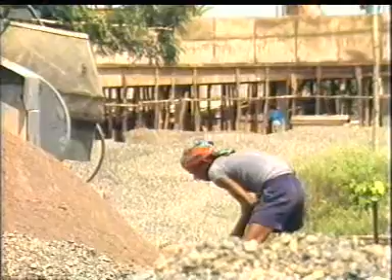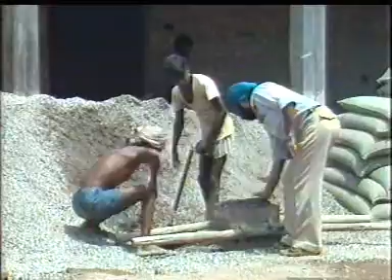Cement concrete is a versatile and most useful modern construction material. To achieve the desired structural and functional properties of hardened cement concrete, its manufacture and properties during plastic stage need to be suitably controlled and checked.

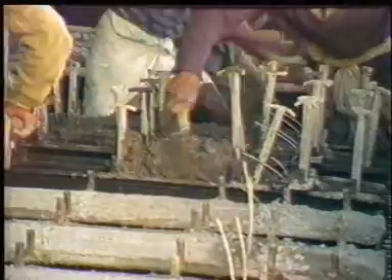The workability is the ease with which the concrete can be placed, molded, and compacted fully in its mold. More scientifically, the workability is that property of plastic concrete which determines the amount of useful internal work necessary to produce full compaction.

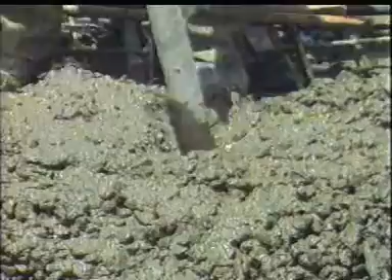Workability is defined as the property of plastic concrete which determines the amount of useful internal work necessary to produce full compaction of molded concrete without any segregation or bleeding. Good workability results in much better compaction and hence dense concrete with minimum air voids.

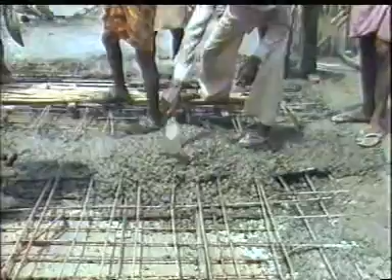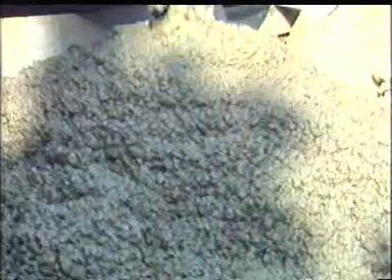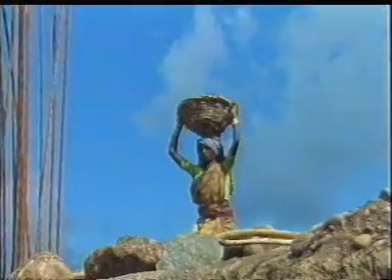The phenomenon of workability is associated with sub-concepts of ease of flow, which indicates flow characteristics of concrete. Prevention of harshness, which indicates surface finishing characteristics. Cohesiveness, that is, prevention of segregation, which indicates homogeneity of concrete. Workable concrete mixes should not segregate. Improper handling leads to segregation.

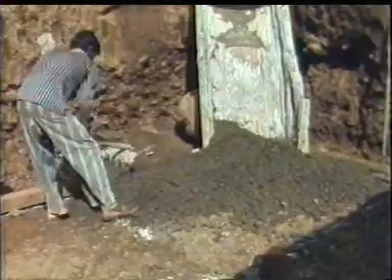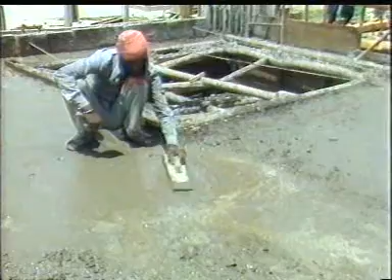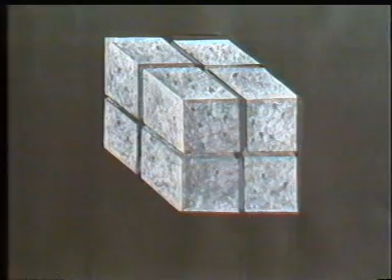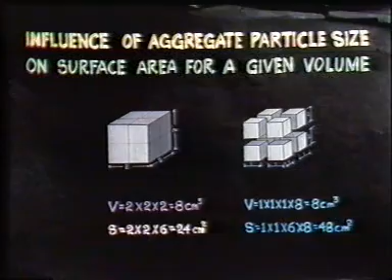Prevention of bleeding, which shows oozing of water and cement slurry to surface. Good concrete mix should not bleed during compaction and finishing. The size, shape, texture, and grading of aggregate particles affect their surface area. Surface area per unit volume increases with the decrease in size. Crushed aggregate has more surface area compared to rounded aggregate per unit volume.

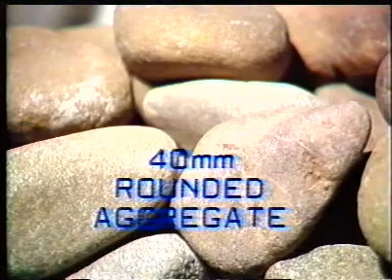Water used in making concrete lubricates the surface of aggregate. The quantity of water per unit volume affects the lubrication of aggregate particles and hence the workability. Thus, the size, shape, texture and grading of aggregate and quantity of water affect the workability of concrete. For achieving the desired workability, the quantity of water is decided on the basis of size, shape, texture, and grading zone of aggregate.

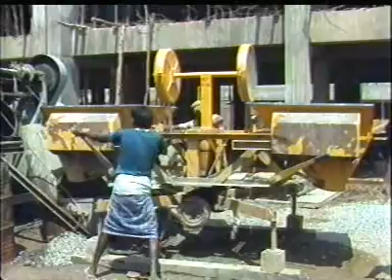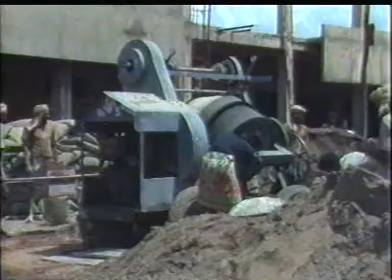To achieve the desired workability, adopt suitable aggregate to cement ratio and fine aggregate to coarse aggregate ratio depending on the sand grading zone, size, shape and grading of coarse aggregate. To achieve economy in the manufacture of concrete or higher yield, the proportion of sand should be just sufficient to produce cohesive concrete mix.

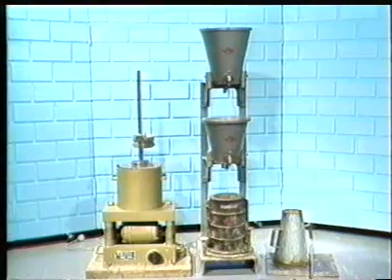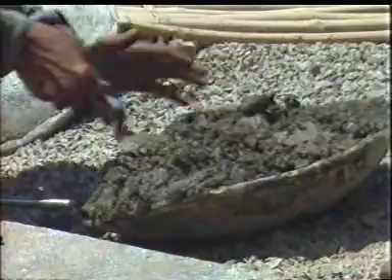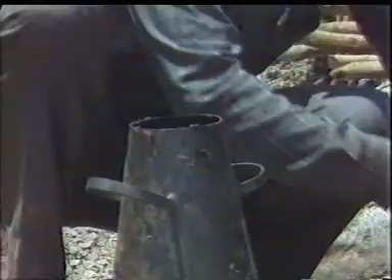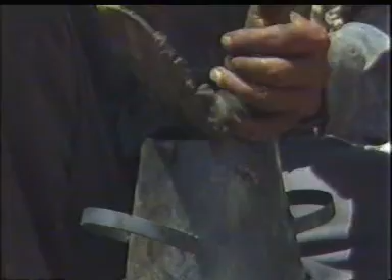A large number of tests are developed for the measurement of workability: slump test, compacting factor test, VB test. Slump test apparatus consists of a truncated cone having 100 mm top diameter, 200 mm bottom diameter, and 300 mm height. The slump cone is filled with concrete mix in 3 layers, compacting each layer with 25 standard strokes of tamping rod.

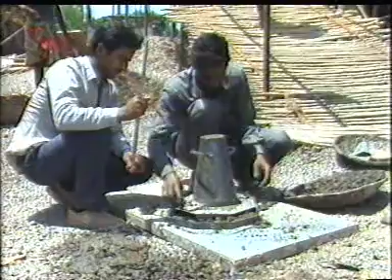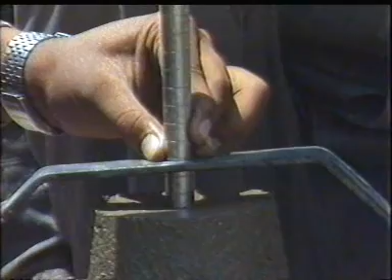The cone is lifted vertically without jerk, and vertical subsidence of top concrete surface is measured from the original top face of the cone. Depending on the type of concrete mix, the slump may be true slump, shear slump, or collapse slump. The slump test is ineffective for mixes of very low and very high workability.

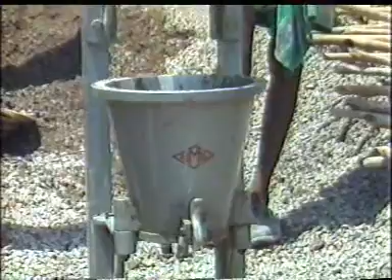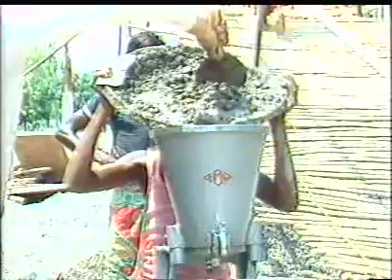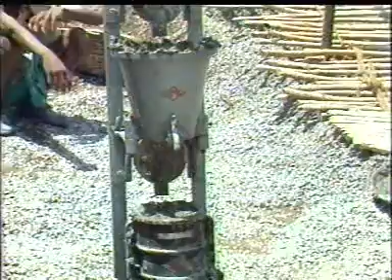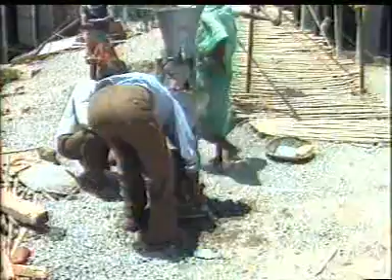Compacting factor test was evolved to relate the external work applied to the internal work required for compaction. This test is very useful, especially in dry mixes. Workability as the degree of compaction is expressed in terms of fraction obtained by dividing the observed weight of concrete allowed to fall in the standard cylinder through a standard height by the weight of fully compacted concrete.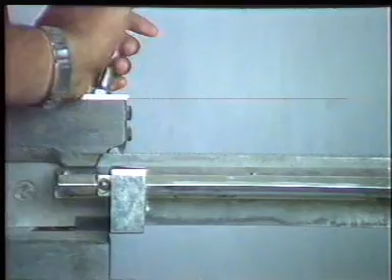Compacting factor is equal to Ws minus Wo divided by Wf minus Wo. Here, Wo is the weight of empty cylinder, Ws is the weight of cylinder and concrete with standard compaction. Wf is the weight of cylinder and concrete with full compaction.

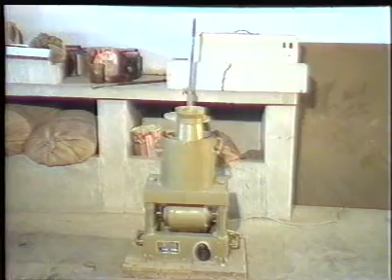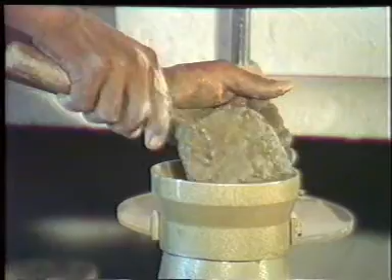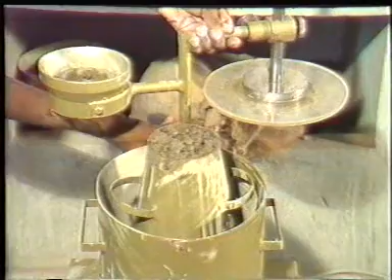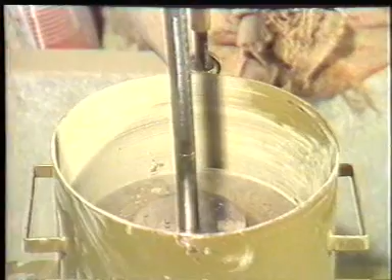VB apparatus test is based on remolding time in seconds of a conical concrete mold to cylindrical mold in a standard vibrating apparatus. The time is measured in seconds required to convert conical concrete mold to cylindrical concrete mold vibrated in a standard VB apparatus. VB test becomes ineffective for very wet concrete mixes.

Ranges of workability of concrete with respect to placing conditions. Concreting of small sections with vibration: workability very low, VB time 20 to 10 seconds, compacting factor 0.75 to 0.80. Concreting of light RCC section with vibration: workability low, VB time 10 to 5 seconds, compacting factor 0.80 to 0.85.

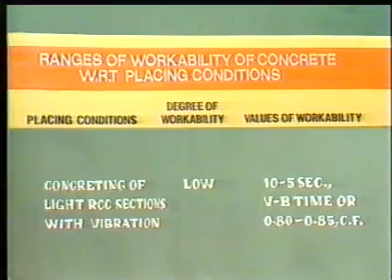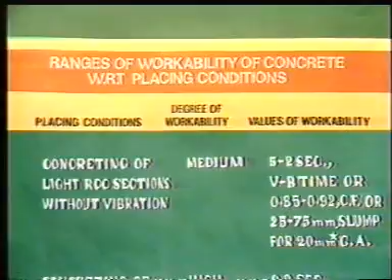Concreting of light RCC section without vibration: workability medium, VB time 5 to 2 seconds, compacting factor 0.85 to 0.92, slump 25 to 75 millimeter. Concreting of heavy RCC section without vibration: workability high, VB time 0 to 2 seconds, compacting factor more than 0.92, slump 75 to 125 millimeter. For smaller size aggregates, the slump value will be lower.

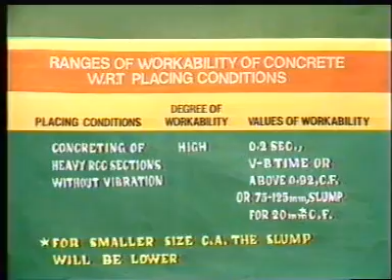Factors affecting choice of workability are: greater the size of the structural element, lesser is the required degree of workability. Narrower the section, higher is the degree of workability required. Higher the reinforcement, higher is the degree of workability required. Where compacting is difficult and done manually, higher degree of workability is required.

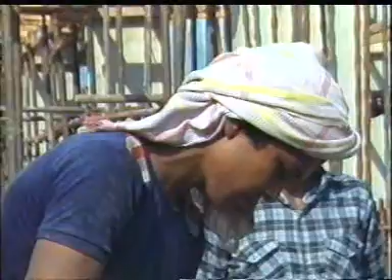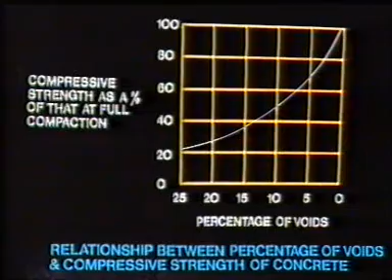Workability is defined as the measure of useful internal work required for full compaction of concrete. Workability property of cement concrete in its plastic stage plays very important role in molding and compaction, which in turn influences the strength of hardened concrete. Workability of cement concrete is affected by the quantity of water, size, shape, and grading of aggregate.

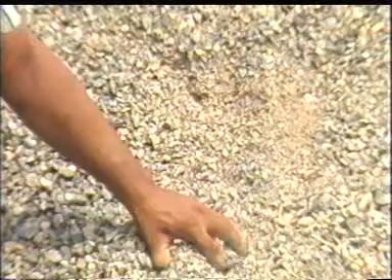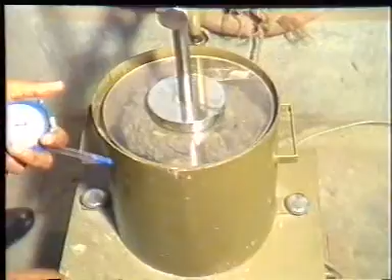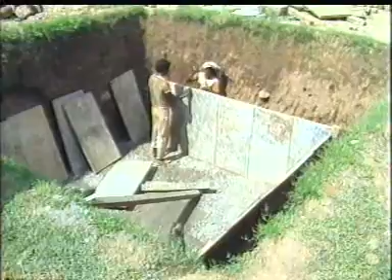Depending on its degree, workability of cement concrete can be measured in terms of slump in millimeter, compacting factor as fraction or VB degree in seconds. Workability of cement concrete mix should be chosen on the basis of placing conditions, size and type of structural member and method of its compaction.